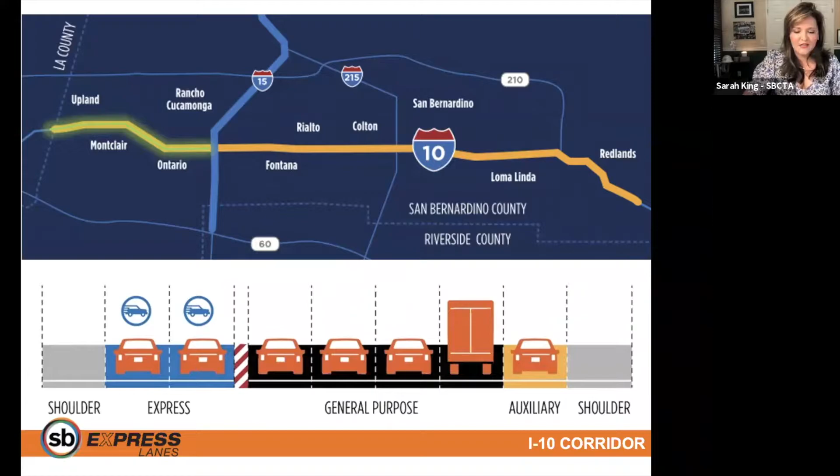Construction broke ground in spring 2020, and the project will keep the current configuration with no changes to the 4 general purpose lanes or the auxiliary lane to assist drivers with merging on and off the freeway between ramps. But we are adding 2 tolled express lanes in each direction and a shoulder where the 1 HOV lane currently is. Construction is anticipated to be complete in 2023.

Now, express lanes are not new to Southern California. However, the I-10 express lanes will be the first express lanes in San Bernardino County. There are express lanes in our neighboring counties, such as the 91 in Orange and Riverside counties, the I-15 express lanes that recently opened in Riverside, the I-10 and 110 up in LA, the toll roads of Orange County, and then express lanes even further south in San Diego County.

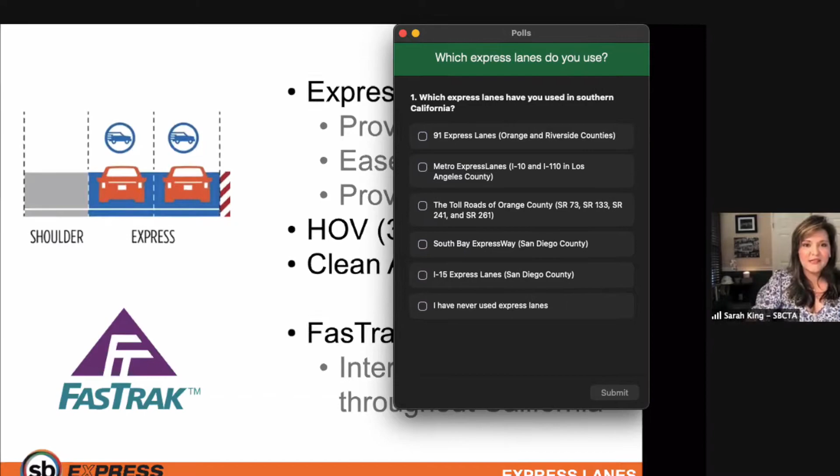So we're going to launch our first poll. Madison, if you can launch that for us. We're asking those who are joining our webinar today if you've used any of the express lanes listed here in Southern California. This is a multiple choice question, so please select all that may apply.

So now what's all the hype about express lanes? Well, they offer a choice to the drivers and they relieve congestion and provide trip reliability throughout the corridor. And express lanes benefit all drivers because those who choose to pay to use the express lanes also free up space in the general purpose lanes.

FasTrak is what's used to collect tolls on every tolled bridge, lane, and road in the state of California. And a pre-established FasTrak account will be required to pay for tolls and receive the lowest toll price on the SB Express lanes when they open in 2023. Madison, can we take a look at our poll results?

Okay, so it looks like the majority of people joining us today have used the toll roads of Orange County, and then sprinkled everywhere I-15 in San Diego County, the 91 express lanes, the Metro's express lanes, and a few of you have never used express lanes.

So for those of you who have traveled in express lanes before, you likely have a FasTrak with one of the agencies that were listed there. And if so, then you're all set to use the SB Express lanes when they open, because FasTrak is interoperable throughout the state.

Now, if you don't have a FasTrak account, and maybe when these open in 2023 you might be visiting someone in San Bernardino County or traveling through the county, you'd likely be an infrequent user of the I-10 express lanes. You have an option to pay for tolls online within 5 days after your trip using the pay online feature. This is a unique feature to San Bernardino County.

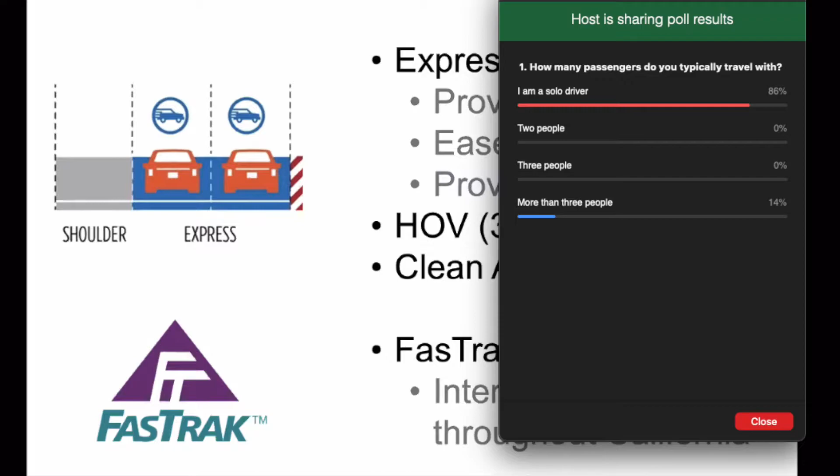Madison, let's take a look at our results. Okay, so it looks like the majority of you here are solo drivers, and then just a few of you have more than 3 people that you're typically traveling with.

So again, if you're a solo driver, these express lanes will simply give you the choice to speed up your commute for a toll. Carpoolers may ride the lanes at low or no cost, but it's important to remember that those who choose to pay a toll improve traffic not only for themselves, but also for everybody traveling within the corridor by freeing up space in the regular lane.

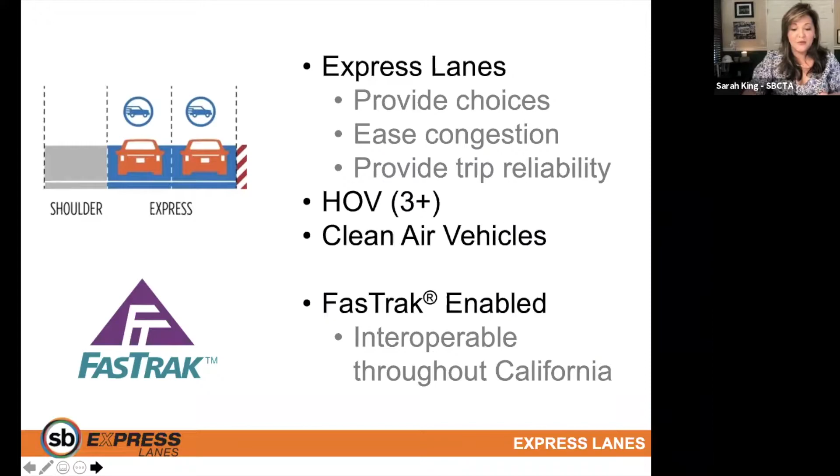Now, since spring of last year, crews have been hard at work building the first phase of the SB Express Lanes project. Construction occurs during daytime and nighttime hours and involves work in the lanes, on our on and off ramps, along the shoulder of the freeway, and even on local streets and roads.

There are 18 bridges throughout the corridor that are either being widened, replaced, or improved to accommodate the widening of the freeway to add the express lanes. Retaining walls and sound walls along the freeway are coming down and going right back up. Crews are also rehabilitating the main line, and lots of utilities are being relocated.

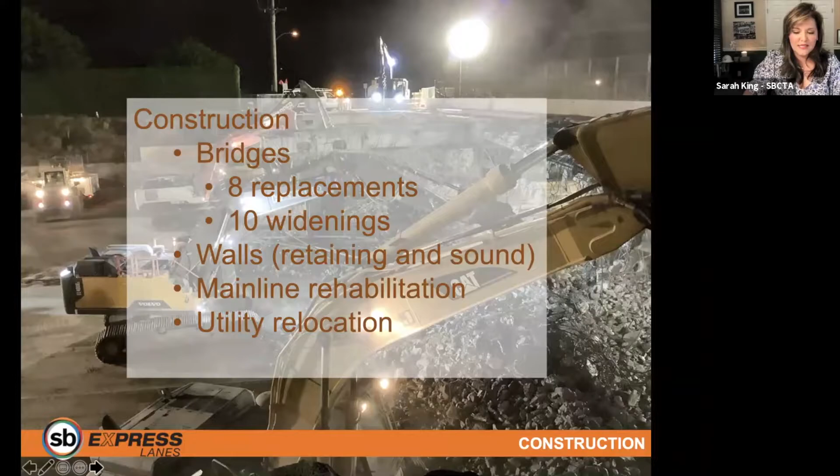Lanes are also being shifted or narrowed, so if you happen to travel within this area, you may see a lot of construction vehicles entering and exiting the freeway as part of this project.

Now, because we're widening the footprint of the freeway, our crews need to take down and rebuild all the retaining and sound walls that are between the neighborhoods and the freeway. As part of this work, they're also relocating utilities and removing trees on several local streets adjacent to the I-10.

So these street and lane closures are needed to allow our crews to work safely and allow us to get through to widening the freeway and building the retaining walls and sound walls. But this specific work as it relates to the walls takes place during weekdays only, during both daytime and nighttime hours.

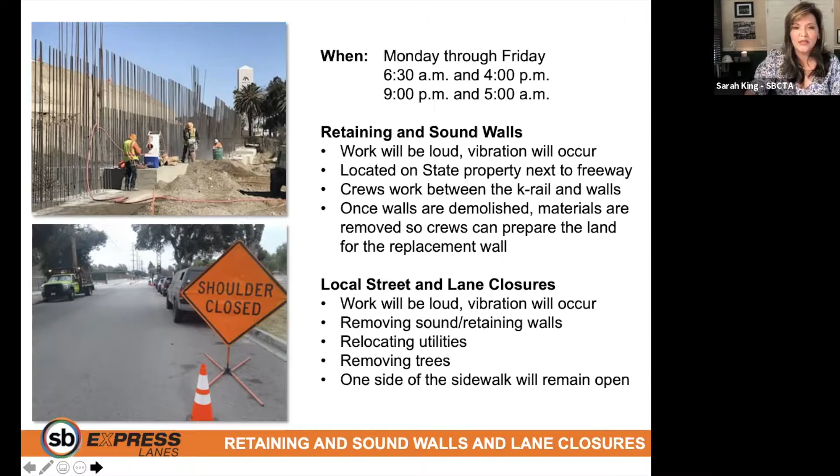Now, today we are working on 11 of the 18 bridges within the 10-mile corridor. I'm only going to highlight a couple of bridges here today. The Sultana Avenue Bridge closed about a year ago, and we're just a month away from opening the new bridge and welcoming back motorists and pedestrians over the bridge.

So if you work or live near Sultana Avenue or any of the bridges within our project zone, please be aware that bridge work can be loud and you may feel vibration from the bridge activities during both daytime and nighttime hours.

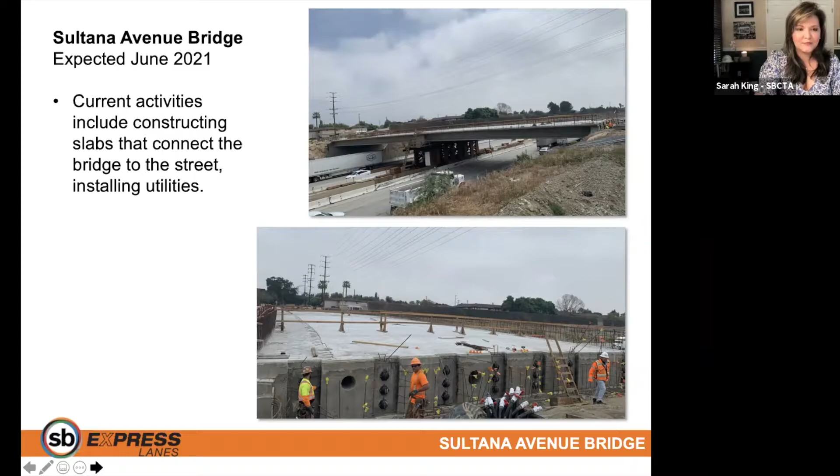Now this summer, 6th Street and Campus Avenue over I-10 will close to all vehicles, pedestrians, and bicycle traffic to allow crews to prepare for demolition.

We used Sultana Avenue as an example here on this slide. This was a full reconstruction, and both 6th Street and Campus Avenue bridges will be full reconstructions. You see Sultana here spanning the I-10 freeway before our crews took down the bridge, and then you magically don't see a bridge at all, but crews are working to rebuild the new bridge.

6th Street is tentatively planned to be closed as early as mid-June, and demolition is anticipated to occur likely late June or early July. More information regarding dates and detours for both 6th Street and Campus Avenue bridges will be provided as additional details become available. Once the original bridge is demolished, crews will rebuild the bridges, essentially making them longer to accommodate the widening of the freeway below.

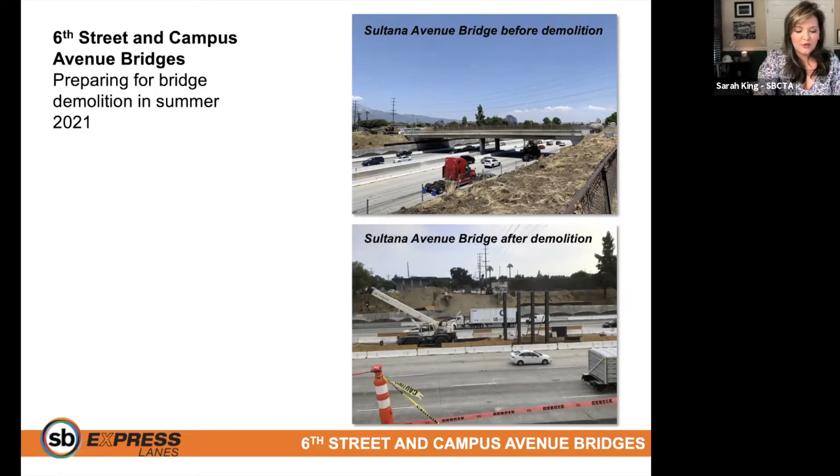Currently, to prepare for this work, utility relocation is occurring at both locations.

Now we're going to dive into the focus of today's webinar: the sights, sounds, and services along the construction corridor. As summer approaches and school is coming to a close for the year, you may find yourself on the road more often. I just read an article today about county fairs and music festivals and different events that are starting to open up to the public.

It's safe to say that compared to a year ago from today, we will be venturing out much more than we were last year. But construction is in full swing within San Bernardino County, especially here on the I-10 corridor. So we want to make you aware of the various sights you'll see and encounter along your route. Simply put, you're going to be seeing a lot of different equipment, crew members, changes, and shifts in your commute.

Here is just a snapshot of some of the things you will see out on our project site. We've got cranes, excavators, concrete pulverizers, pumps, pavers and mixers, grinders, cure rigs and stripers, water trucks, dump trucks, pile drivers, lights, and traffic control devices, bobcats, and forklifts. That's just to name a few. I'm sure there's quite a lot more.

But what will you hear or experience? It'll be hammering, pounding, backup alarms, and engines. We understand firsthand that construction can be a short-term inconvenience for a long-term traffic solution, but our crews are working around the clock to ensure you have a safe and sustainable transportation system for years to come. We appreciate your patience throughout this project.

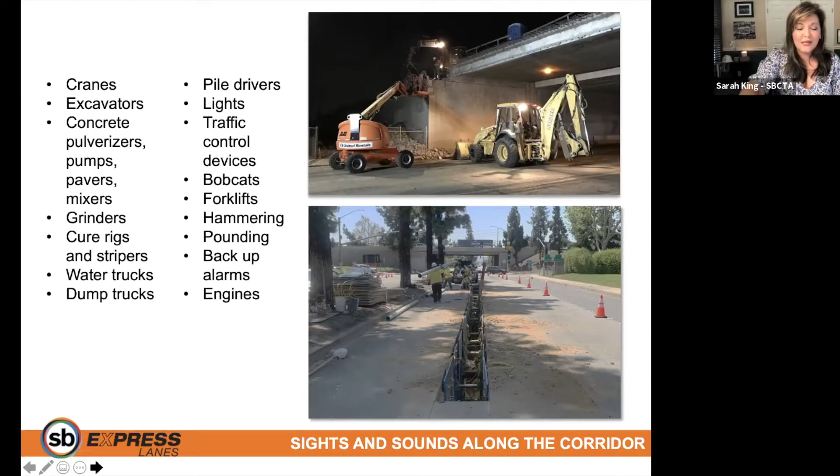We're going to highlight some of the key equipment you'll be seeing out on the roadway. Let's start with excavators. Excavators are an essential piece of equipment for any construction project. As I've shared, crews are working to replace, widen, or improve 18 bridges and reconstruct retaining walls and sound walls throughout the project area. Workers use excavators for heavy-duty digging and hauling off materials. They come in a variety of types and sizes and can be used with various attachments like a bucket or hammer.

Buckets are the most standard excavator attachment, which is what you see here. You can see the bucket at the end of the excavator. Hammers help expedite the demolition process. On the I-10 Express Lanes project, excavators are used for breaking ground, digging trenches, lifting heavy materials, crushing pavement, and demolishing a bridge. So the left photo is an excavator with a bucket attachment doing some prep work for a wall, and the right photo shows the concrete being broken up and hauled away from a bridge that was just taken down.

Standard sized excavators weigh between 10 and 45 tons, and heavy duty excavators can sometimes weigh more than 45 tons. So just to put that into perspective, an elephant, which is the largest of all land animals, weighs between 3 to 4 tons, which means each of the large excavators seen here is equivalent to more than 10 elephants. So we're really dealing with a lot of heavy duty equipment on our freeways.

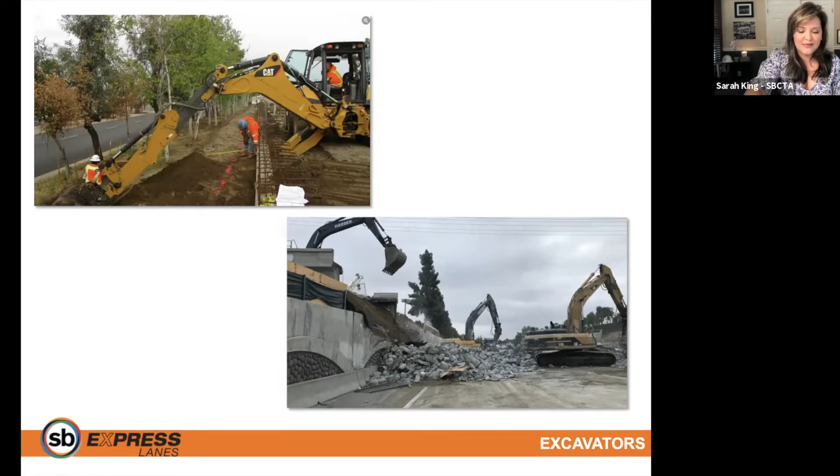For pile driving, once a bridge is demolished, foundations for the new bridge can begin, requiring new piles or other structures. Piles can be steel, concrete, or a combination of both. They are an essential part of the underground structures needed to create the foundation that supports the new road, bridge, or ramp. A pile driver is a device used to push piles by vibrating or hammering the pile into the soil.

How deep are the piles going into the ground? It really depends on the Earth's soil and the operation, so it can vary, but usual depths range from 20 to 100 feet into the ground. Just try to imagine about an 8-story building, but underground. That's where these piles are going.

If you live or work near one of our pile driving operations, you may have seen our team distributing flyers door to door, because we want to prepare you in advance of this type of operation. With pile driving, you'll hear a steady cadence of a very loud and large ding or ring of a bell, and that's the hammering of the steel pile going into the ground. It's really something you can't miss.

Again, I can't stress this enough: we appreciate your patience and understanding throughout this operation and the entire construction along the corridor. If you live or work nearby, you will know that this operation can be very loud, and you may even feel vibrations at times.

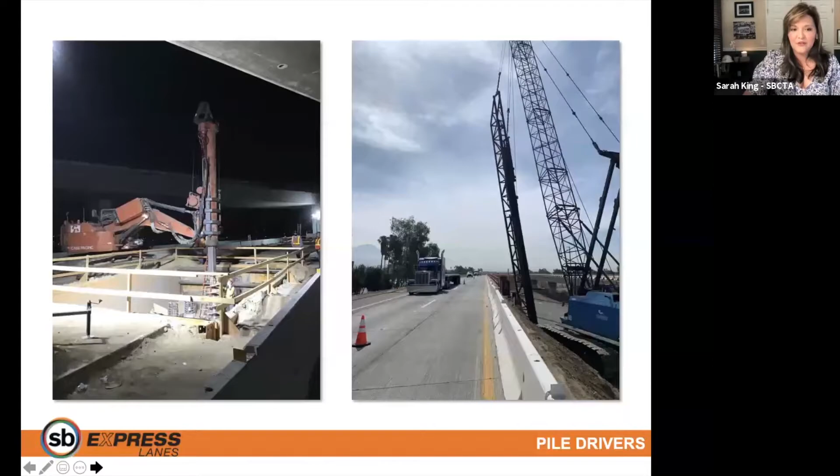Along the I-10 Express Lanes corridor, crews are paving and reconstructing the bridges, also curbs, gutters, and even sidewalks. A concrete mixer is used to mix cement, powder, sand, water, and gravel to form a slurry that hardens into concrete. The trucks seen here have a large drum which turns when it's filled with wet concrete so that the concrete will not harden.

Crews then pour the concrete into forms or molds, which is what you see here on the right photo, while the truck continues to spin, causing humming and vibrations until the job is complete.

Once concrete is mixed, it has a set pour time, so oftentimes concrete plants are local to the project area. And once the concrete is poured, crews take into account cure times for the concrete to harden or dry before we can allow people or vehicles to travel over the surface.

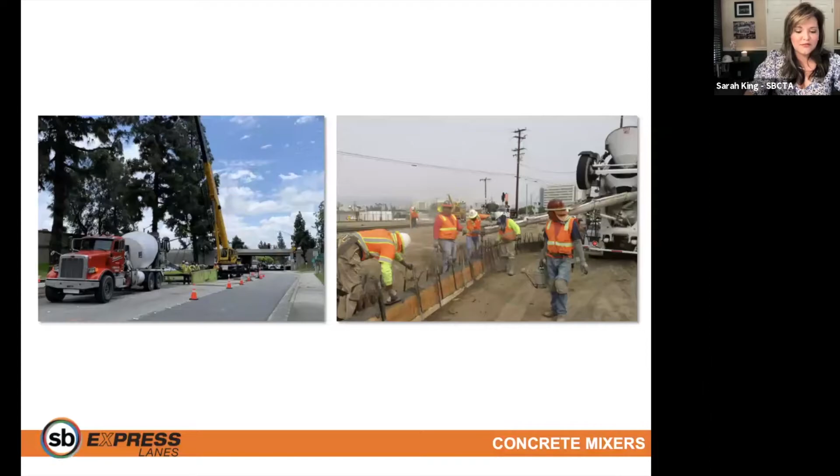As we've discussed, there's a lot of activity taking place day and night on the on and off ramps, the main lines, and our local streets. And all these types of activities require safety measures for the traveling public and the crew around them. As you can see here on both photos, there is live traffic going on either side of the operation, so safety is of utmost importance for you as our traveling public, but also for the crews.

To maintain access to the traveling public, the space within a construction zone can sometimes be pretty tight or constrained. As such, all of the construction equipment we've discussed and seen here in the presentation is equipped with a backup alarm. The repetitive beeping noise emitted from backup alarms on trucks and construction equipment is a critical safety component to keep crews safe at the work site.

The backup alarms on the trucks are there because a driver may not be able to see behind him. So that beeping tells people behind the truck that a vehicle is moving and they should be aware and stay safe.

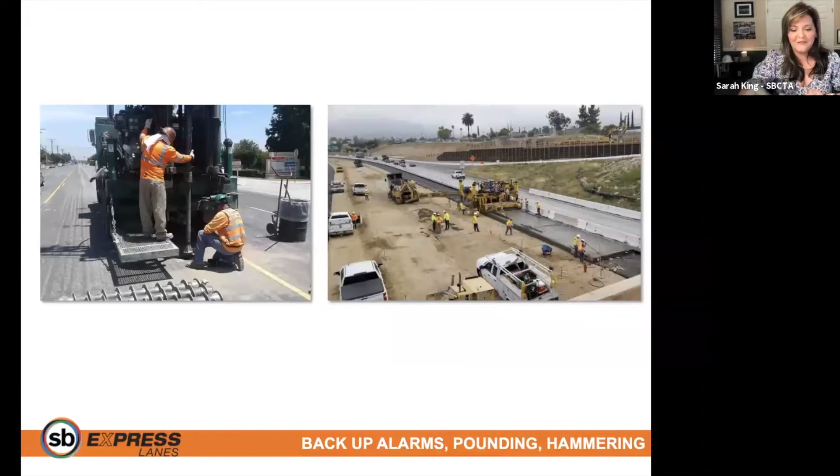So now we've talked a lot about different types of activities, and of course the equipment that goes along with those activities. But bottom line, the work is taking place around the clock. So a little bit of understanding so that you might be prepared when we share this information within our closure alerts or on social media.

The contractor works very closely with its subcontractors and the construction crew members to schedule and plan activities during the appropriate closure windows. For example, a daytime closure is typically from 9 a.m. to 2 p.m. A nighttime closure is typically from 9 p.m. to 5 a.m. We have the 10 freeway, which meets the I-15, and there are connectors as part of this project that need to be worked on, and they have their own set of work windows that crews can work in.

There are also 55-hour closure windows, and those typically take place between a Friday night and Monday morning, and are planned throughout the duration of the project for the next two years. While they're not necessarily a full shutdown of the freeway, these are 55-hour lane closures, but they still impact your commute, something you should be aware of and prepare for in advance. They allow our crews to perform necessary work over an extended period of time that they might not be able to finish over one night.

Then we have 10-day ramp closures, and these are necessary for crews to restripe lanes, place K-rail, set up traffic control, and realign the ramps with the newly widened freeway, which requires closures over multiple consecutive days. In fact, this morning at 5 a.m., we opened the Haven Avenue westbound on-ramp after closing it for 10 days, which took place on May 17th.

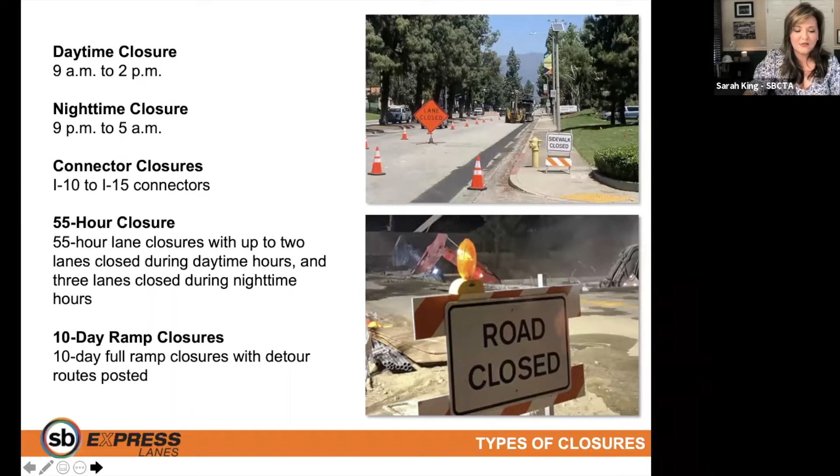So finally here, we've got a key critical service that helps those in need. It's our Freeway Service Patrol, most commonly known as FSP.

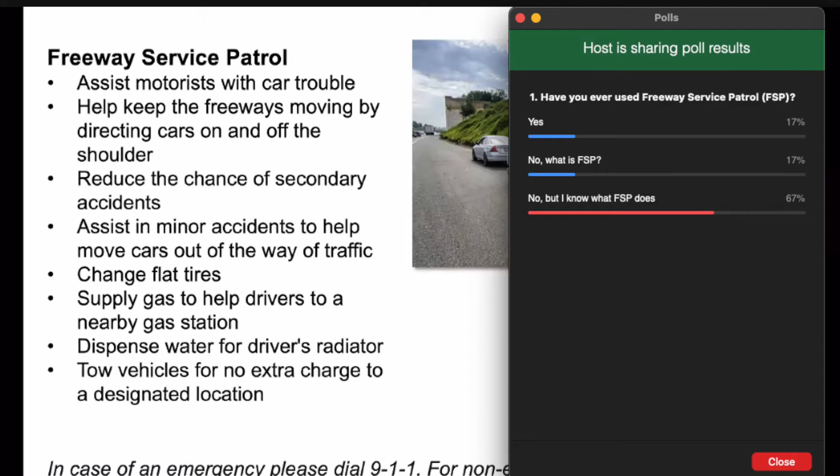So again, they're the roadway heroes. They're the ones that help you when you are in need. Of course, if you're in an emergency, please call 911. But these vehicles are patrolling San Bernardino County freeways during the work week to get your vehicle out of harm's way and assist you as much as they can.

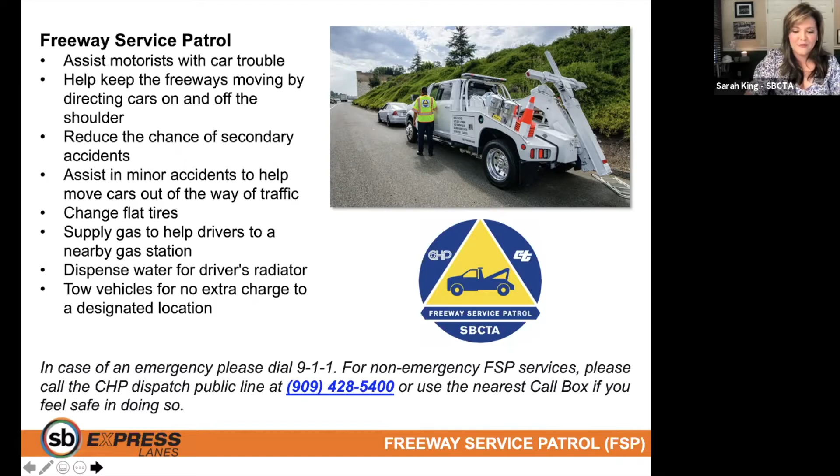If you are in need of FSP and you don't happen to see them right at the moment, you can always call the CHP dispatch public line at 909-428-5400, or you can use the nearest call box if you feel safe in doing so.

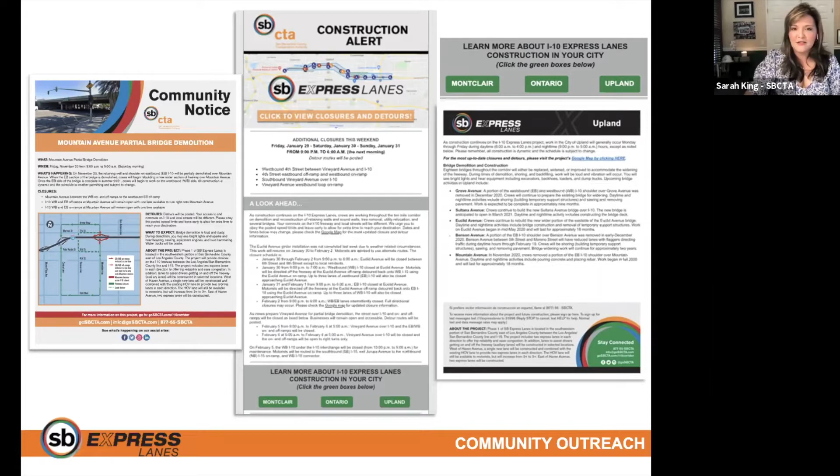You've seen it here and might have experienced it on the road, but this project has a number of different operations activities, and therefore we have closures as part of that, which we've already discussed. So we always encourage you to plan ahead, allow for extra time to reach your destination, or seek alternate routes to avoid the construction area during this time.

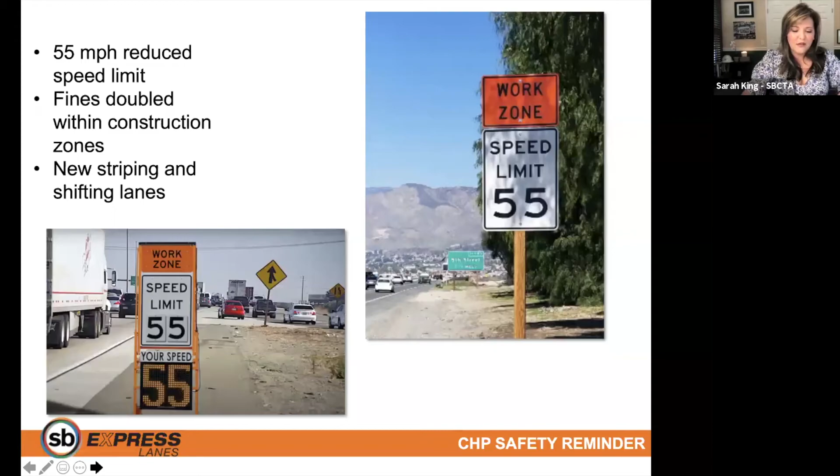That brings us to our final slide, which is our CHP Safety Reminder. Construction, as you've heard and seen today, is progressing on the I-10 Express Lanes project and many other highway projects within San Bernardino County. As you venture out on the road, please be aware that your commute on the freeway or local streets may be different. Remember to slow down, obey the posted speed limits, which for the I-10 Express Lanes project corridor is reduced to 55 miles per hour. This reduced speed limit is in effect through project completion and is enforced by the California Highway Patrol. Please watch for workers and construction equipment, be alert and on the lookout for new striping and shifting of lanes, and always use caution while driving throughout the construction zone.

That concludes our presentation for our May webinar. Thank you so much for joining us. Hopefully you learned a little bit more about the I-10, but really about all the different types of equipment and activities that take place, not just for this project, but many transportation infrastructure projects throughout the county. It's just something to remember—to be vigilant. Your surroundings might be different from week to week, and there are a number of our crew members out there on the job site working day and night to improve our commute for the future.